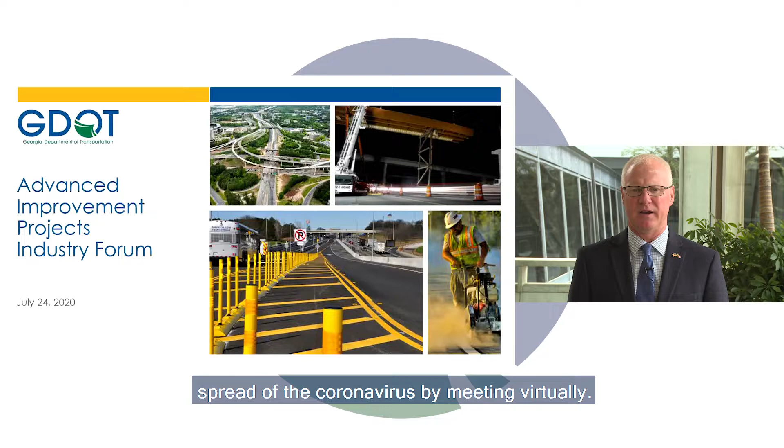Thank you for joining us and welcome. I'm Russell McMurry, the Commissioner of the Georgia Department of Transportation. This industry forum for 3 of the Interstate 285 Advanced Improvement Projects is a bit different from how we normally conduct our industry forums. In these unprecedented times, Georgia DOT is responding to the impact created by the spread of the coronavirus by meeting virtually.

We at Georgia DOT are committed to ensuring the health and safety of our team, our private industry partners, and the public, which is why the industry forum has been pre-recorded. I would like to personally thank you for being accommodating to this process and assure you that the members of the department are still able to provide information about the project's delivery goals, the anticipated scope, the anticipated procurement, and the potential risk in today's presentation. So without further ado, let's get started.

Thank you, Commissioner. My name is Darryl VanMeter, and I am pleased to be part of the leadership team in the P3 division at GDOT. Today is one of the many milestone days in the journey towards successful delivery of our program, and we're proud to have this opportunity to discuss these projects.

In this presentation, the department will provide information about the project's delivery goals, the anticipated scope, the anticipated details surrounding the MMIP, the procurement process, and the potential risks. We believe this information will be very valuable to the industry, who we look forward to partnering with in the delivery of our program. This is a recorded presentation.

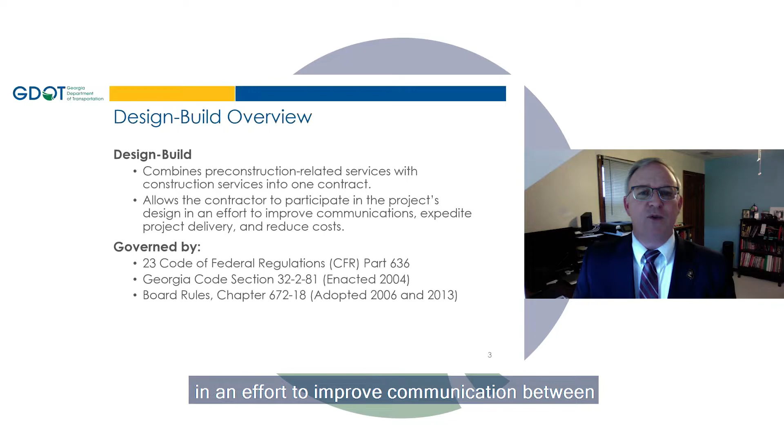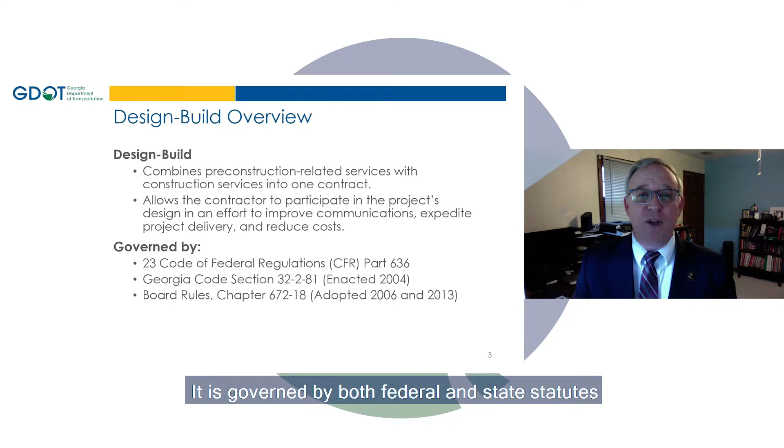The design-build delivery method combines pre-construction related services with construction services into one contract. It allows the contractor to participate early in the project's design in an effort to improve communication between disciplines, expedite project delivery, reduce costs, and deliver overall innovation and quality aligned with the department's goals. It is governed by both federal and state statutes and our board rules as shown here.

Today you will hear from several speakers. I will be giving an update on the MMIP overview. You'll hear from Andrew Honig, the department's Design Build Program Manager, who will provide guidance on the procurement process and requirements. You'll hear from 3 project managers, Xavier James, Anthony Tate, and Rick O'Hara of my office, who will speak to their respective projects and give you some details on project overview.

The MMIP represents significant long-term investment in the state's transportation infrastructure. This investment will improve mobility and enhance the quality of life on some of the most congested corridors in Georgia. I like to tell people the MMIP is all about mobility, and that it can be broken down into people and freight mobility. One of the critical pieces of analysis we had done independently was to understand what the return on investment is from the MMIP, and it is very impressive.

We recently reached a program milestone when the first of the MMIP projects reached substantial completion. Earlier in June, the first phase of the widening of I-85 opened to traffic. 2 other projects are under construction near Savannah, and we have several projects in active procurement.

Since announcing the MMIP, the department has been listening to the industry as well as other states with similar projects and capability, as well as other stakeholders.

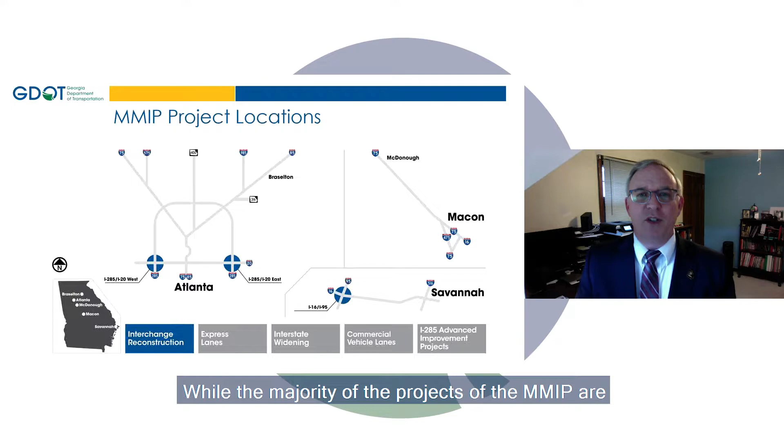We've reevaluated and will advance 6 improvement projects along 285. While the majority of the projects of the MMIP are in the metro Atlanta region, we consider the MMIP truly a statewide program, as there are 2 projects near Savannah, 2 widening projects north of Atlanta, and one commercial vehicle lanes project south of Atlanta between McDonough and Macon.

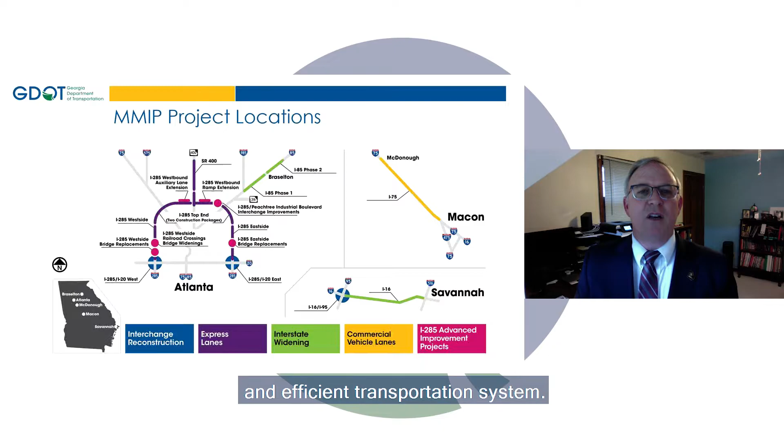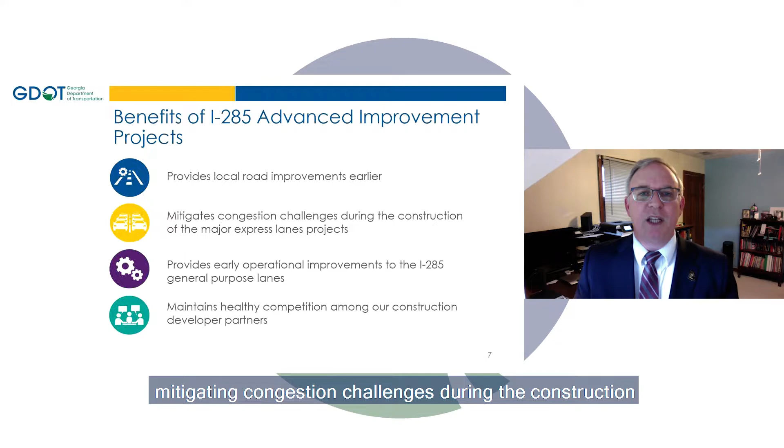With the addition of the express lanes, operational improvements, and safety enhancements, Georgia will have a more connected, safe, and efficient transportation system. With the advancement of the projects along 285, benefits to our state's motorists, residents, businesses, and indeed our industry partners include providing local road improvements sooner, mitigating congestion challenges during the construction of the larger major express lanes projects, providing earlier operational improvements to the 285 general purpose lanes, and maintaining healthy competition and opportunity among our construction partners.

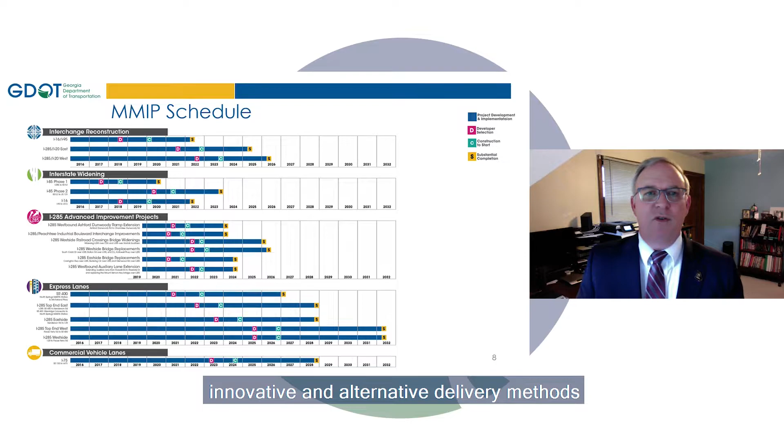The MMIP projects will be delivered through innovative and alternative delivery methods such as design-build and public-private partnerships, allowing GDOT to accelerate construction schedules. The projects will create additional capacity for more reliable trip times, more efficient movement of freight, safety improvements, and expanded multimodal options, including transit.

As you can see, the middle portion of this graphic highlights the I-285 advanced improvement projects. This graphic further distinguishes the program's phased approach at delivering these AIPs.

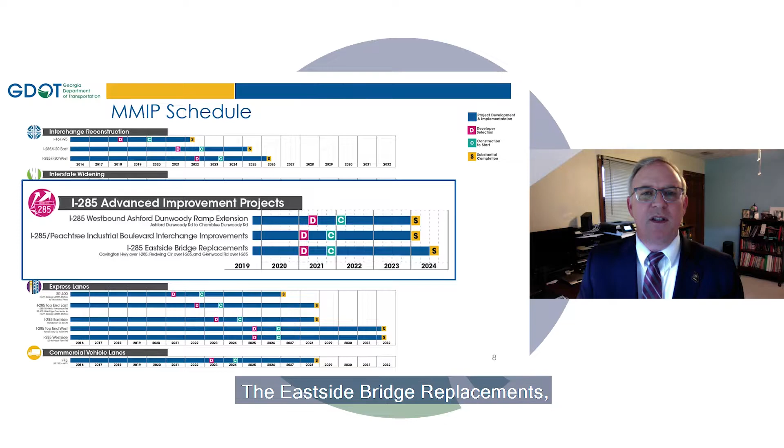The Eastside bridge replacements, PIB interchange improvement, and Westbound Ashford Dunwoody ramp extension projects will be the first 3 to let, all within the first and second quarters of calendar year 21. The 3 other AIPs will begin procurement in fiscal year 22.

And now I'd like to introduce and hand it over to Andrew Honig, GDOT's Design Build Program Manager, to go through the procurement timeline and next steps.

Thank you, Daryl, and thank you to everyone for viewing this Industry Forum presentation for 3 very exciting projects for the department. Today, I will be discussing the procurement process and timelines for the first 3 advanced improvement projects before the respective project managers discuss some of the project specifics.

The I-285 Eastside Bridge Replacement Project and the Ashford Dunwoody Ramp Extension Project will be procured as best value, while the PIB Interchange Project will be procured as a 2-phase low bid with a shortlist.

All 3 of these projects are advertised through separate PNAs on June 26th. Our industry forum is occurring through this pre-recorded presentation to the industry on July 24th, with one-on-one meetings occurring on July 27th and July 28th.

Following those one-on-one meetings, the Eastside Bridge Project's timeline is as follows. RFQ advertisement will be September 11th. SOQs will be received by the department on October 8th. The department will then notify the shortlisted firms on October 23rd, and the RFP will be issued on October 30th.

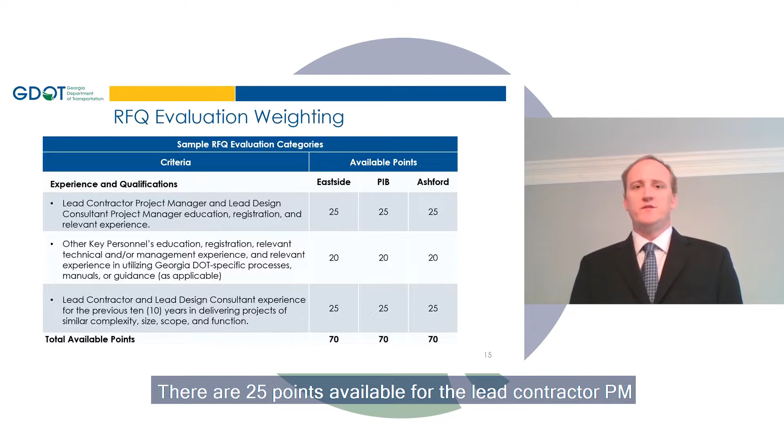This slide shows the sample RFQ evaluation categories for experience and qualifications, which are consistent for all three projects. There are 25 points available for the lead contractor PM and the lead design PM education, registration, and relevant experience. There are 20 points available for the other key personnel's education, registration, relevant technical and/or management experience, and relevant experience utilizing Georgia DOT specific processes, manuals, or guidance as applicable.

There are 25 points available for the lead contractor and lead design consultant experience for the previous 10 years in delivering projects of similar complexity, size, scope, and function. The subtotal for this section is 70 points.

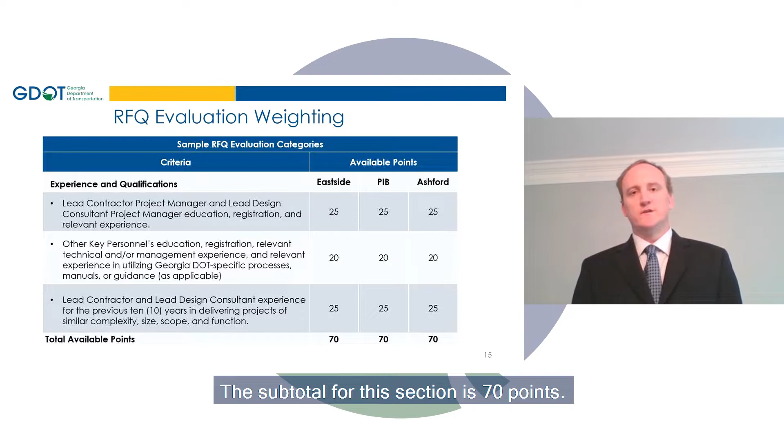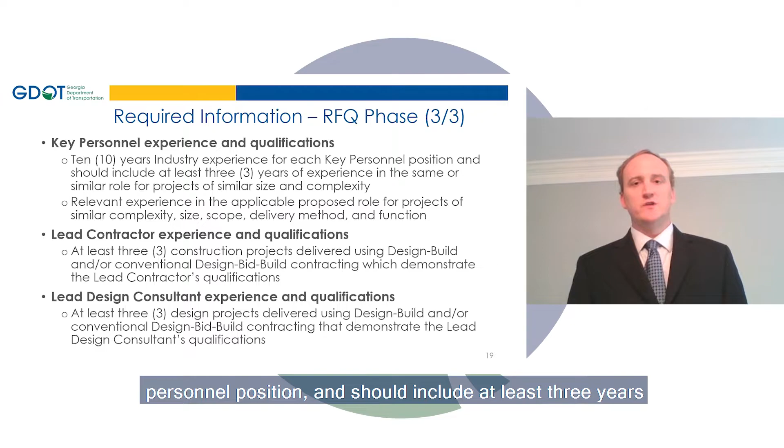Finally, proposers will be required to submit their key personnel experience and qualifications, including 10 years of industry experience for key personnel positions, and should include at least 3 years of experience in the same or similar role for projects of similar size and complexity.

The lead contractor is required to have 3 construction projects delivered through design build or design bid build contracting, and the lead design consultant must have at least 3 design projects using DB or DBB contracting.

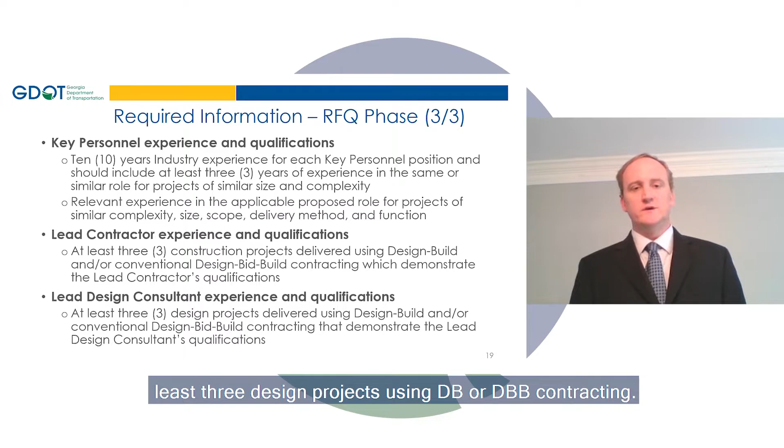Proposal packages will include a technical proposal and a price proposal with a firm fixed price secured by a proposal bond. The department does plan to provide a stipulated fee to responsive proposers not selected for award.

Proposers on best value procurements may submit ATCs, and again this is for the 2 projects that are best value, which are the Ashford Dunwoody ramp extension project and the I-285 Eastside bridge project.

As always, confidentiality will be maintained throughout the RFP process. We do anticipate holding one-on-ones during the RFP advertisement, and accepted ATCs will be approved on a project-specific basis.

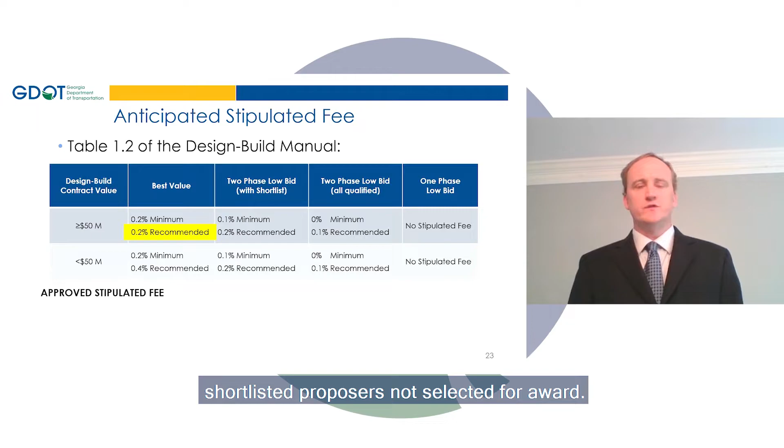As mentioned, all 3 of these projects will provide stipulated fees to the responsive shortlisted proposers not selected for award. Note the different approved stipulated fees for each type of procurement method, and also for each project.

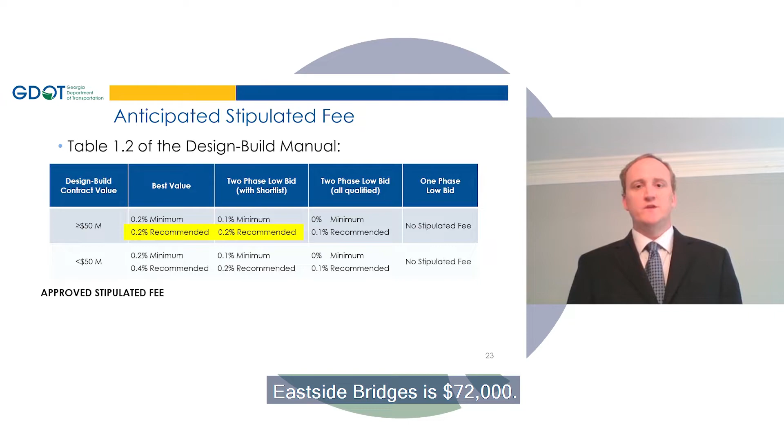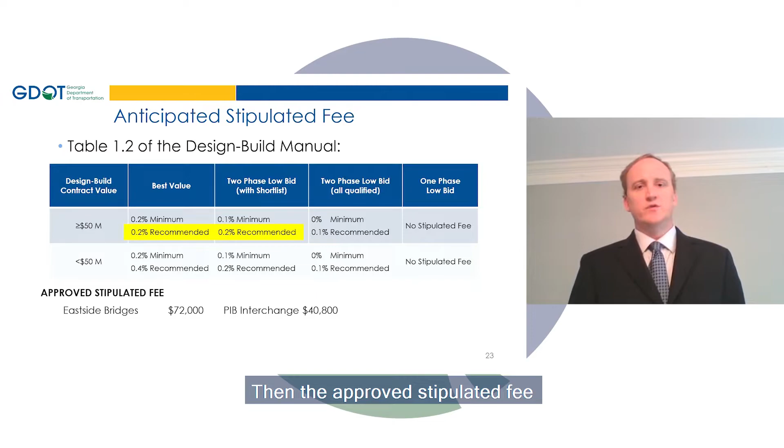The approved stipulated fee for Eastside bridges is $72,000. The approved stipulated fee for PIB interchange is $40,800. And the approved stipulated fee for the I-285 westbound Ashford Dunwoody ramp extension project is $100,000.

In exchange for a stipulated fee, proposers must turn over to GDOT all project relevant information collected and prepared during the preparation of the price and technical proposals.

This may include ATCs, revised plan layouts, geotechnical data, CAD files, and detailed project schedules, or any correspondence with any agencies that's done during the advertisement.

This information will be provided to the awarded design build team, and GDOT also has the ability to negotiate approved ATCs from non-successful proposers into the awarded DB team's contract in order to obtain additional value or cost savings.

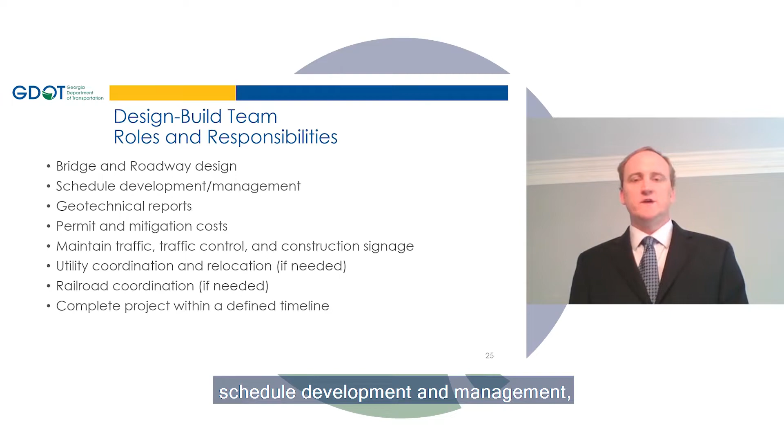The design build team's roles and responsibilities include bridge and roadway design, schedule development and management, geotechnical reports such as BFI and WFI, permit and mitigation costs if any, maintenance of traffic control and construction signage, utility coordination and relocation if needed, railroad coordination if needed, and completing the project within a defined timeline. There will be a construction time frame that you need to meet in the contract.

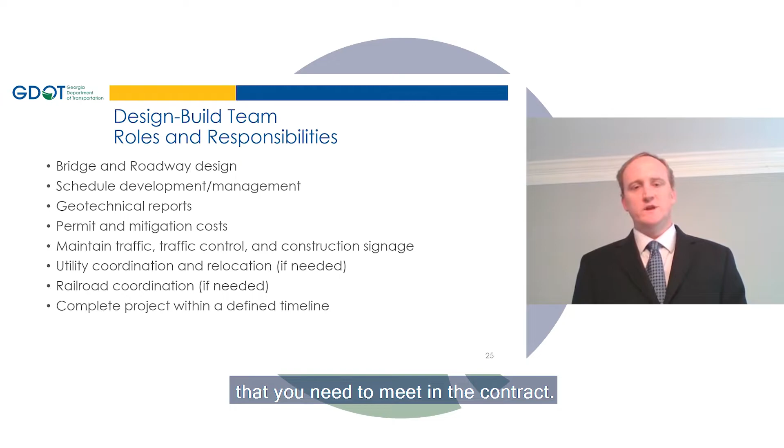Georgia DOT's roles and responsibilities include submittal review by GDOT and/or maybe our post-let GEC, environmental studies and NEPA reevaluation post-let, media relations, and also construction oversight and CEI.

Material testing will be provided by OMAT, and then CEI will be performed by GDOT OID or supported by a consultant procured by OID. The CEI consultant may not be a prime consultant or engineer of record on any AIP design build team.

Procurement for the CEI contract is expected to begin this fall, and it will be for all 6 AIP projects through one CEI contract. And with that, I'd like to turn the presentation over to Xavier James to discuss the

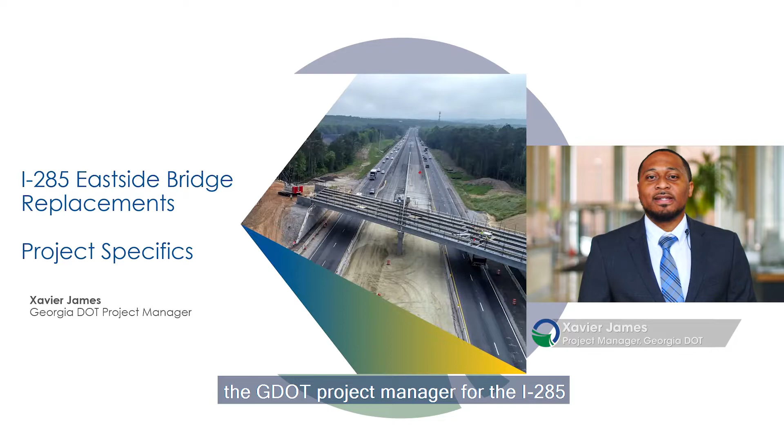I-285 Eastside Bridge project. Hello, my name is Xavier James, the GDOT project manager for the I-285 Eastside Bridge replacements. I will be discussing some project specifics with you today.

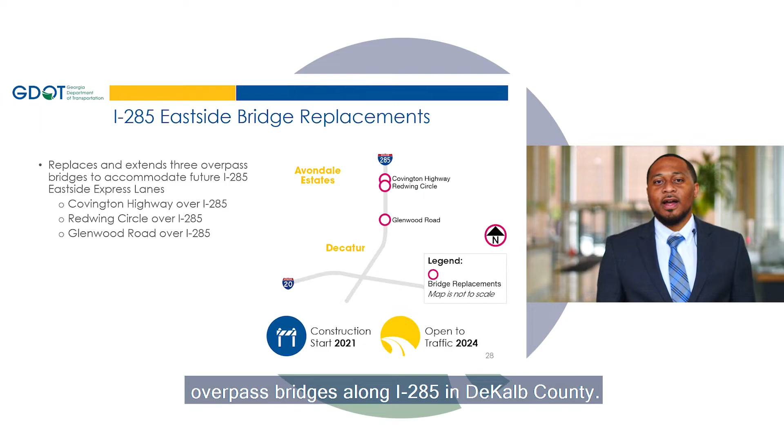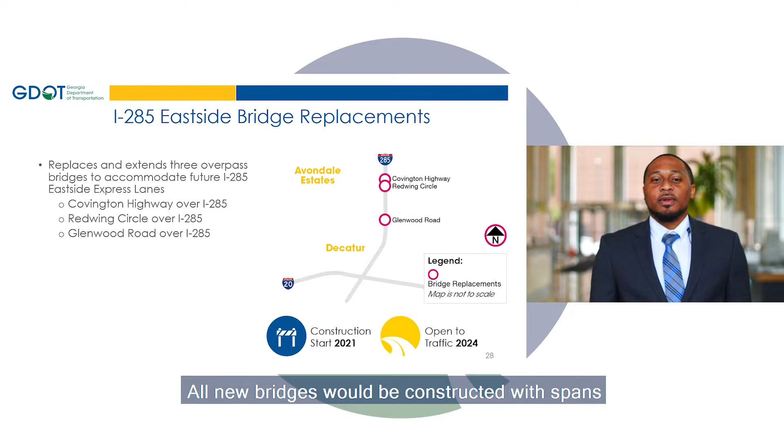This project proposes to replace and extend 3 overpass bridges along I-285 in DeKalb County. The map shows the 3 bridges to be replaced, which includes Covington Highway, Redwing, and Glenwood over I-285. All new bridges will be constructed with spans long enough to accommodate the future I-285 Eastside Express Lane project. Construction is anticipated in the beginning of 2021 and open to traffic in 2024.

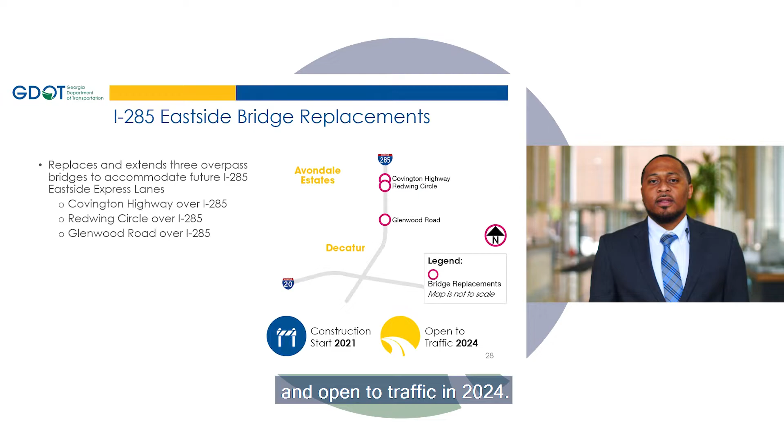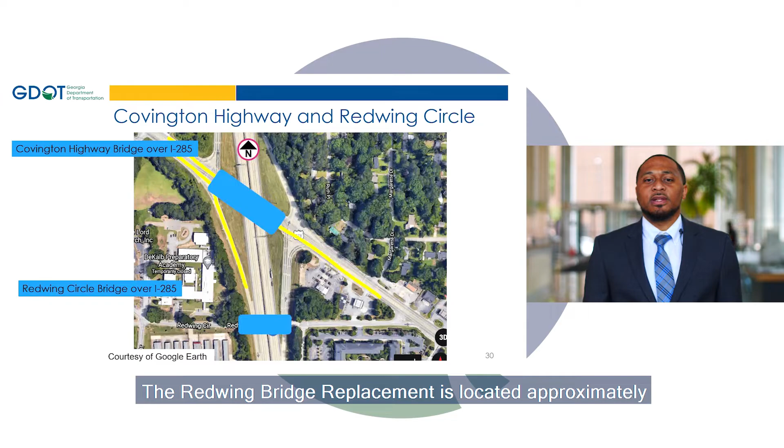The Redwing Bridge replacement is located approximately 2.6 miles north of the I-285 I-20 interchange. The replacement of the bridge will be on an existing alignment and will require a detour.

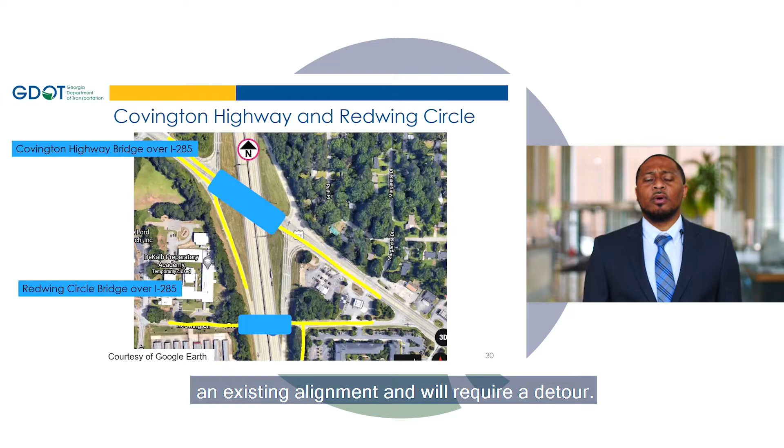The Covington Highway Bridge consists of 3 lanes in each direction and is also on a model route. This is a State Route 12, US 278. The new bridge will be built offset from the existing bridge. 3 of the 4 on-off ramps require work and the approach roads require extensive work.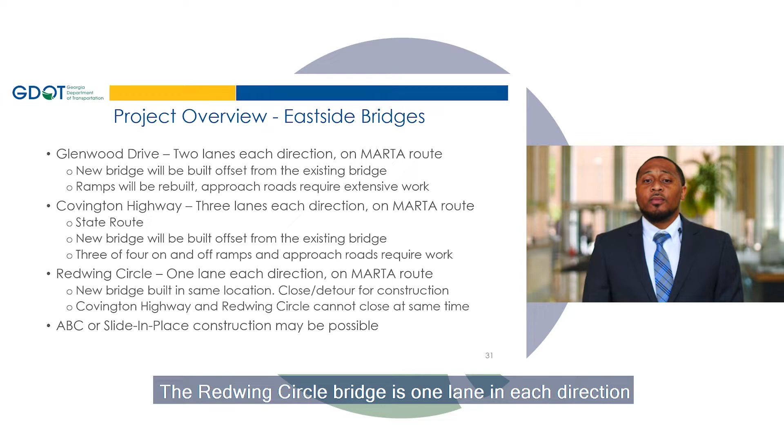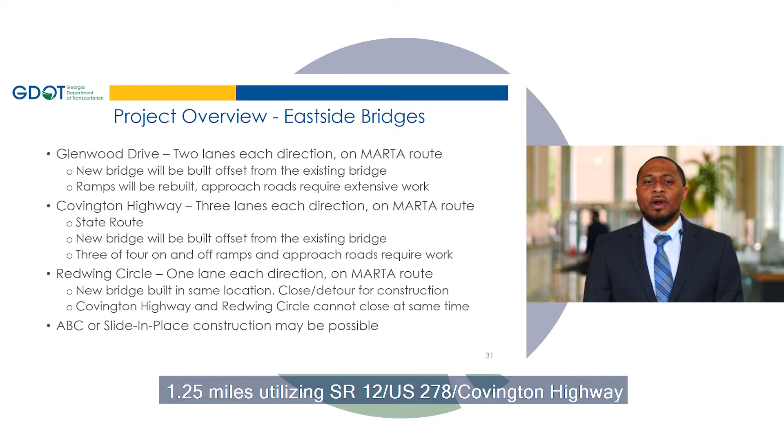The Redwing Circle Bridge is 1 lane in each direction and is also on a MARTA route. The new bridge will be built on an existing alignment and will require a detour for construction. The proposed detour route is approximately 1.25 miles utilizing State Route 12, US 278, Covington Highway to the north, and the proposed detour duration is approximately 6 to 8 months.

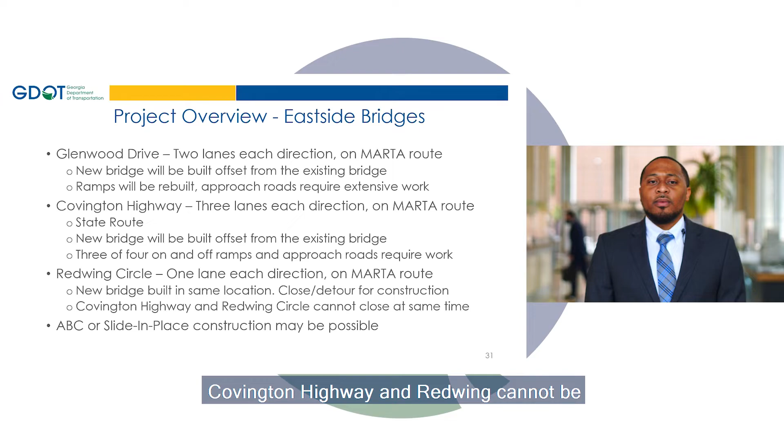Covington Highway and Redwing cannot be closed at the same time. ABC or Slide-In-Place construction may be possible.

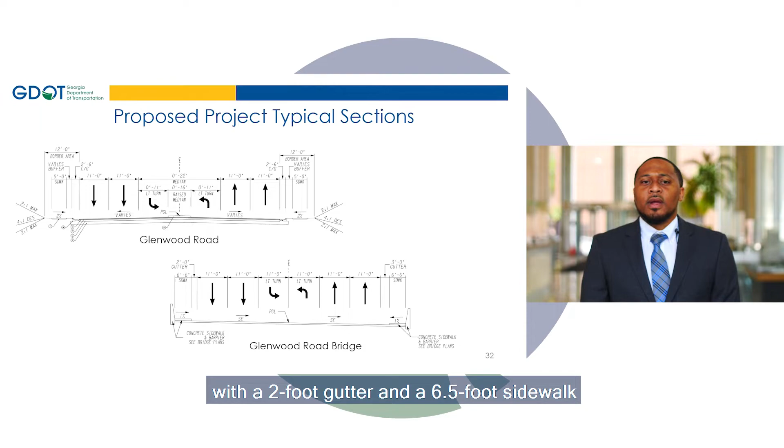This slide shows the proposed typical section for Glenwood Road and Glenwood Road Bridge. The proposed typical section consists of 11-foot travel lanes in the eastbound and westbound direction with a 2-foot gutter and a 6.5-foot sidewalk on each side of the bridge. Left turn lanes are also proposed to access the I-285 northbound and southbound ramp entrances.

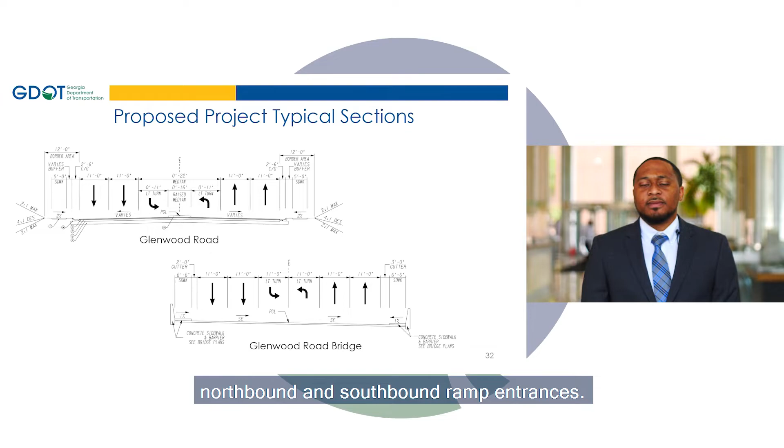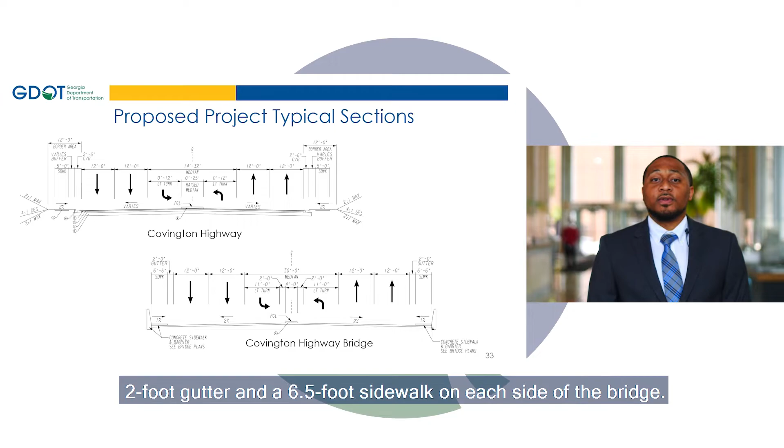This slide shows the proposed typical section for Covington Highway and Covington Highway Bridge. It consists of two 12-foot travel lanes in the east and westbound direction with a 2-foot gutter and a 6.5-foot sidewalk on each side of the bridge. A single 12-foot left turn lane is proposed in each direction to access I-285 north and southbound ramp entrances.

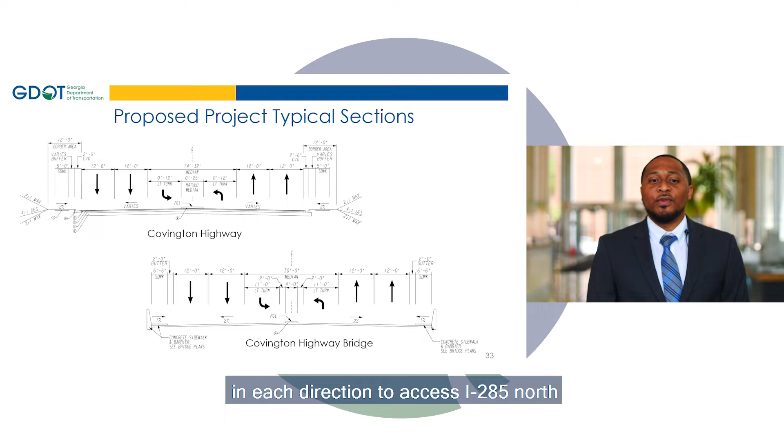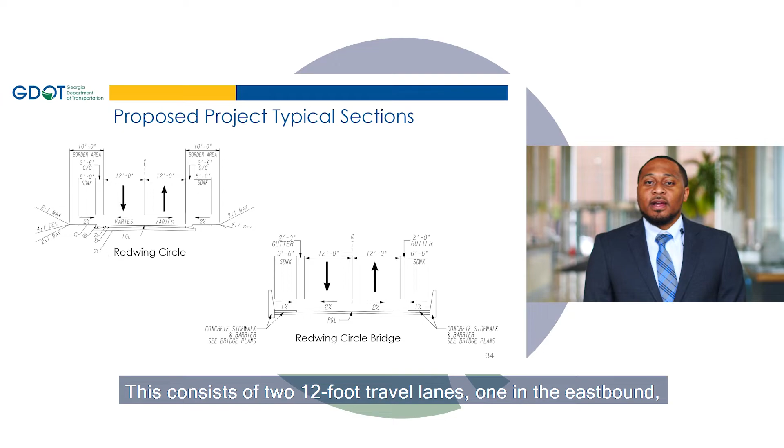This slide shows the proposed typical section for Redwing Circle and Redwing Circle Bridge. This consists of two 12-foot travel lanes, 1 in the eastbound direction, 1 in the westbound direction, with a 2-foot gutter and a 6.5-foot sidewalk on each side of the bridge. The proposed profile would be raised in order to obtain the current minimum required vertical clearance over the I-285 mainline lanes.

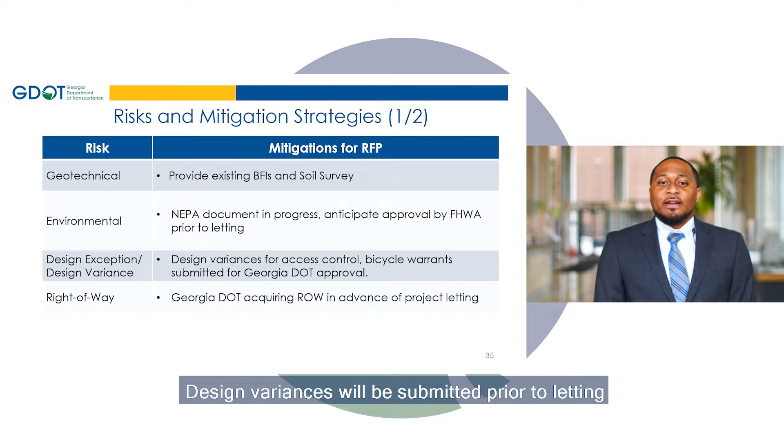The project has minimum risk. The NEPA document is in progress and the approval is anticipated prior to the letting. Design variances will be submitted prior to the letting, and GDOT is acquiring right-of-way in advance of the project letting.

There has been ongoing outreach with local and impacted stakeholders, including MARTA. Utility relocation is required, and GDOT is currently working on coordination. Relocation should occur concurrently with construction.

This project will use the best value method for procurement. The first phase criteria were covered earlier, and the second phase will begin with the issuance of the RFP on October 30th, 2020. The RFP best value weighing will be 30% on the score of the technical proposal and 70% on the score of the price proposal.

The proposer with the lowest proposed project cost will be awarded the maximum of 700 points, and all others will be scored as a function of their relative cost.

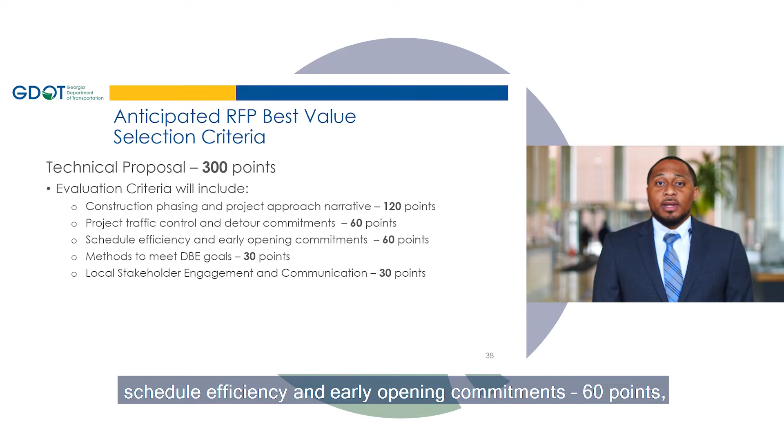The technical proposal will be scored out of a possibility of 300 points. The evaluation criteria will include construction phasing and the project approach narrative, 120 points; project traffic control and detour commitments, 60 points; schedule efficiency and early opening commitments, 60 points; methods to meet DBE goals, 30 points; and local stakeholder engagement and communication, 30 points.

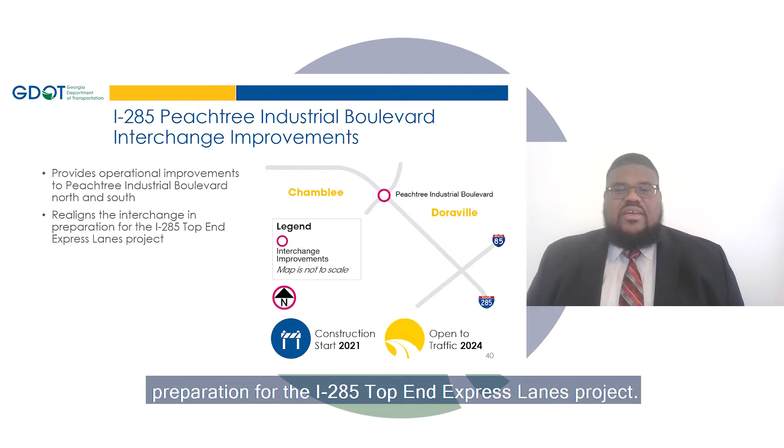I'm Anthony Tate, Georgia DOT Project Manager for the I-285 Peachtree Industrial Boulevard Interchange Improvements Project. I will be discussing the project over the next several slides. The project provides operational improvements by combining the I-285 westbound exit ramps to Peachtree Industrial Boulevard north and south. It also realigns the interchange in preparation for the I-285 Top-End Express Lanes project. Construction is due to start in 2021, and the project's anticipated completion is 2024.

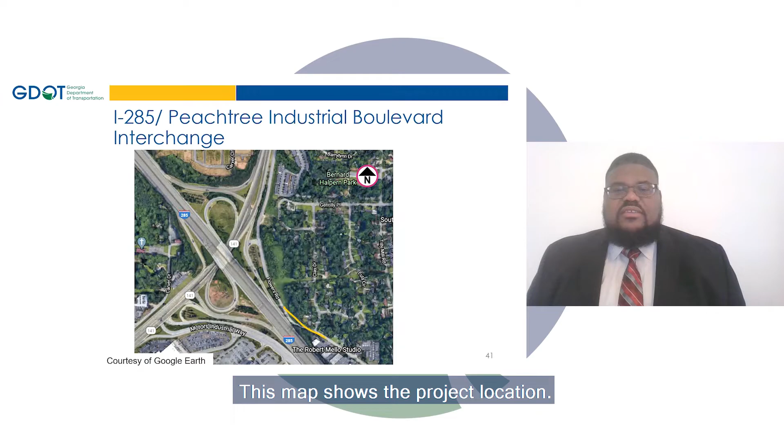This map shows the project location. Flowers Road will be realigned. The ramp to northbound PIB will be reconstructed with an additional exit lane. A single lane bridge will be constructed over PIB. The newly constructed exit ramp will connect to the existing PIB southbound ramp from 285. This project will create a two-lane exit from I-285 West to Peachtree Industrial Boulevard, with one lane continuing in each direction.

A new exit lane and full-width shoulder will be constructed adjacent to the existing exit lane, beginning approximately 1,000 feet east of the current departure point. A painted gore will separate the two lanes of exit traffic from the general purpose lanes.

One lane will continue to PIB northbound. Access to Flowers Road will be eliminated. One lane will continue to PIB southbound. A single lane bridge will be constructed over all lanes of PIB. Part of Flowers Road, a local city road, will be realigned to accommodate the new ramp.

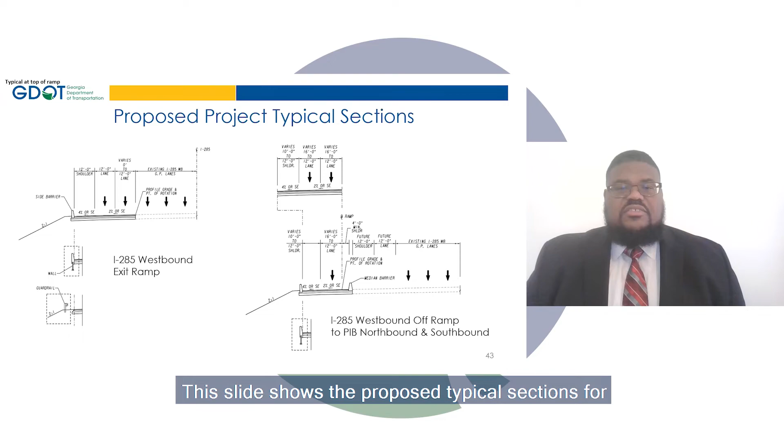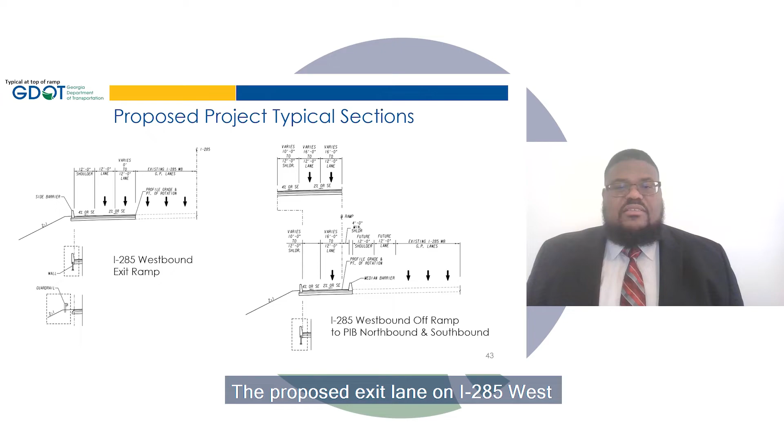This slide shows the proposed typical sections for the I-285 westbound ramp and the I-285 westbound off-ramp to PIB northbound and southbound. The proposed exit lane on I-285 West will be 12 feet wide with a full-width shoulder. The proposed two-lane exit ramp will be full-width exit lanes with a full-width shoulder. The new bridge structure will have a single lane and a full-width shoulder.

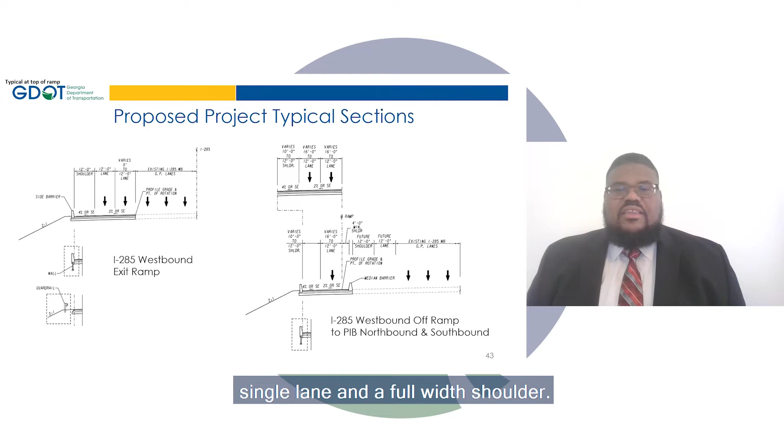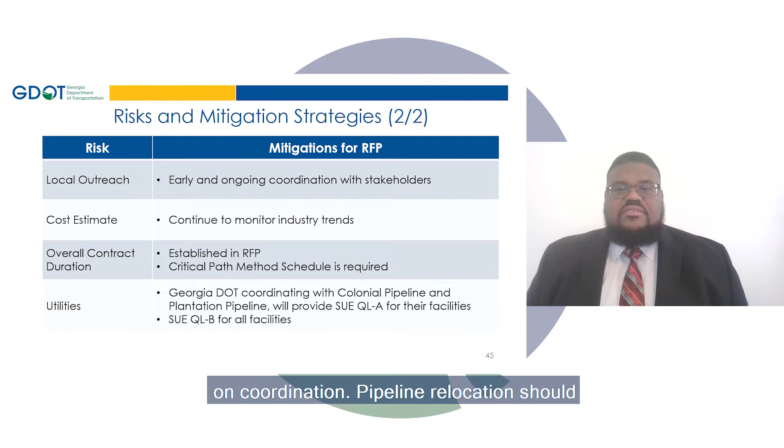Utility relocation is required, and Georgia DOT is currently working on coordination. Pipeline relocation should occur concurrently with construction. The project will use the two-phase low bid method with a short list.

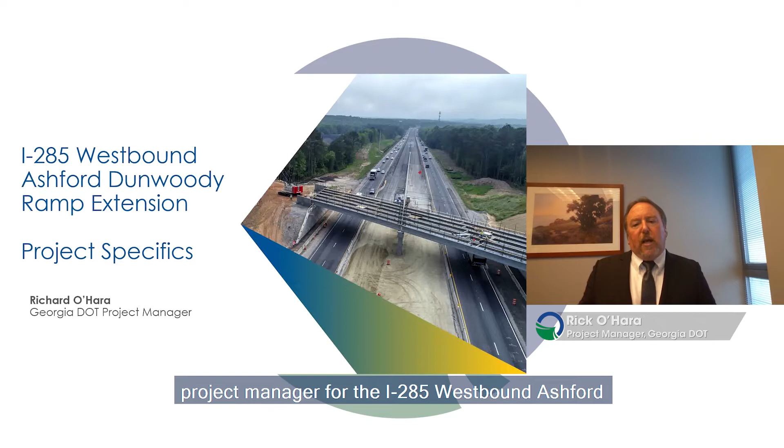Hello, I'm Rick O'Hara, and I serve as the Georgia DOT Project Manager for the I-285 westbound Ashford Dunwoody ramp extension project. The next several slides will discuss the project. The I-285 westbound Ashford Dunwoody ramp extension project is proposed from just east of the Chamblee-Dunwoody Road Bridge over I-285 to Ashford Dunwoody Road. The project length is approximately 1.6 miles.

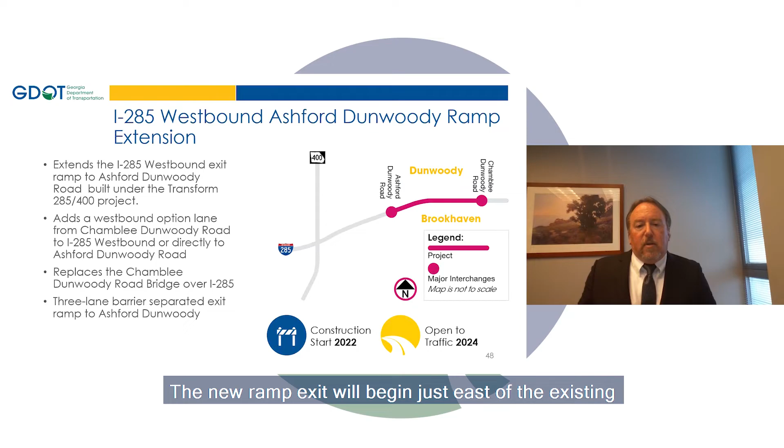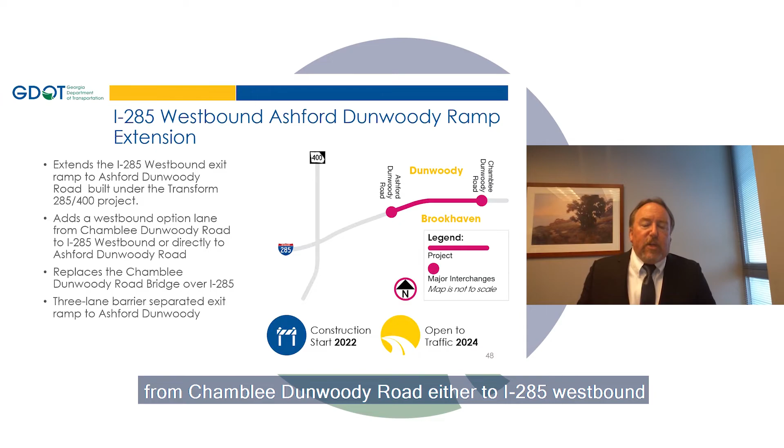This project proposes to extend the westbound I-285 exit ramp to Ashford Dunwoody Road, currently being built under the Transform 285-400 improvement project. The new ramp exit will begin just east of the existing Chamblee-Dunwoody Road Bridge over I-285. The project also proposes to add a westbound option lane from Chamblee-Dunwoody Road either to I-285 westbound or directly to Ashford Dunwoody Road as part of the ramp system.

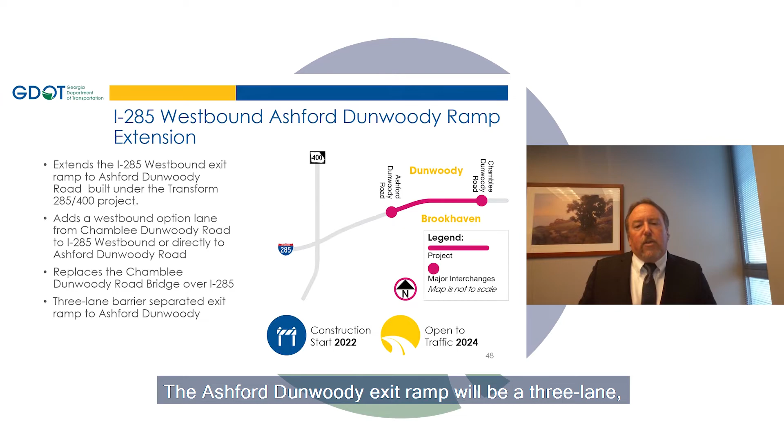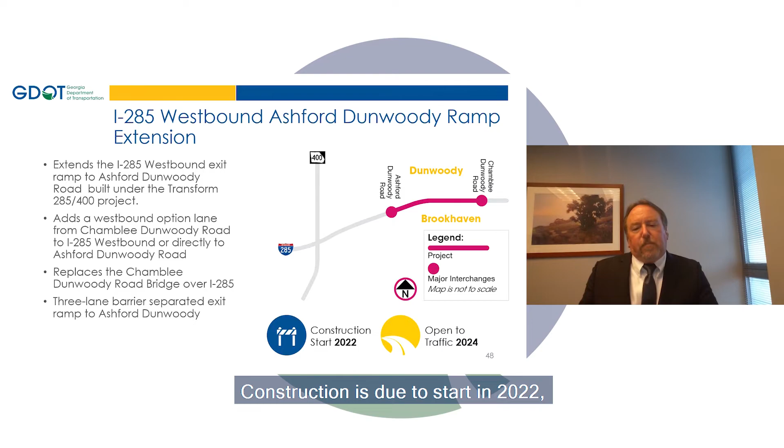Additionally, the project proposes to replace the Chamblee-Dunwoody Road Bridge over I-285. The Ashford Dunwoody exit ramp will be a 3-lane barrier-separated system just north of the existing westbound general purpose lanes. Construction is due to start in 2022, and this project's completion is anticipated in 2024.

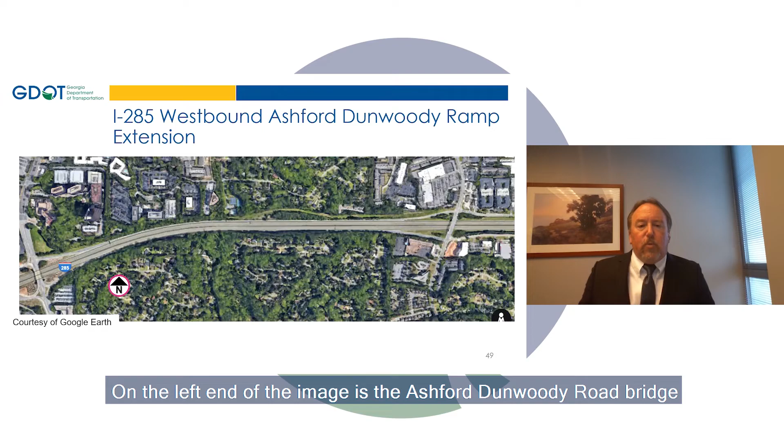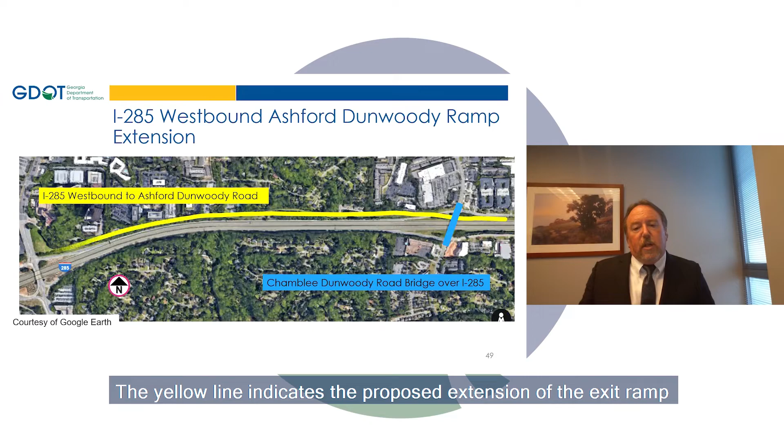This map shows the project location. On the left end of the image is the Ashford Dunwoody Road Bridge over I-285, and on the right end is the Chamblee Dunwoody Road Bridge over I-285. The blue bar indicates the proposed replacement of the Chamblee Dunwoody Road Bridge, which will be lengthened to accommodate the ramp extension beneath it. The yellow line indicates the proposed extension of the exit ramp from I-285 general purpose lanes to Ashford Dunwoody Road.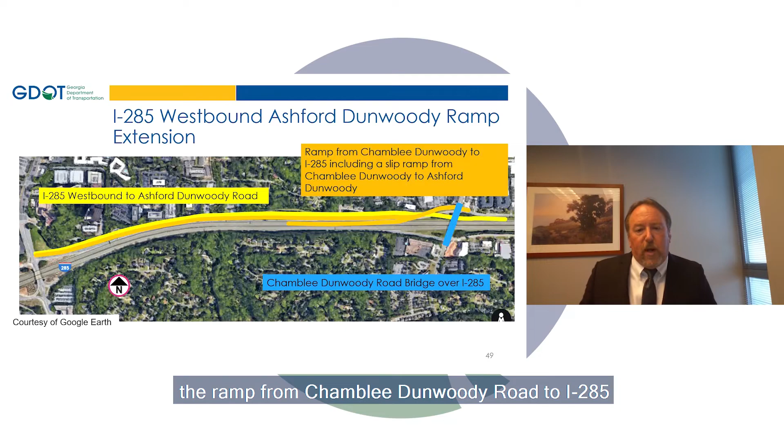The orange line indicates the proposed extension and reconstruction of the ramp from Chamblee Dunwoody Road to I-285, including a slip ramp from Chamblee Dunwoody Road to Ashford Dunwoody Road. The selected design build team will be responsible for creating a 3-lane barrier separated exit ramp to Ashford Dunwoody Road.

This ramp must include a new exit ramp from I-285 westbound to Ashford Dunwoody Road, with the extension beginning approximately 1,000 feet east of the Chamblee Dunwoody Road Bridge over I-285. This extension will start as 2 lanes, then join with the Chamblee Dunwoody Road ramp to end in 3 lanes.

A new 2-lane entrance ramp from Chamblee Dunwoody Road to I-285 westbound is proposed to be an elevated structure braiding over the exit ramp extension for Ashford Dunwoody Road. Additionally, this ramp's lanes will separate into options for either I-285 westbound general purpose lanes or onto Ashford Dunwoody Road.

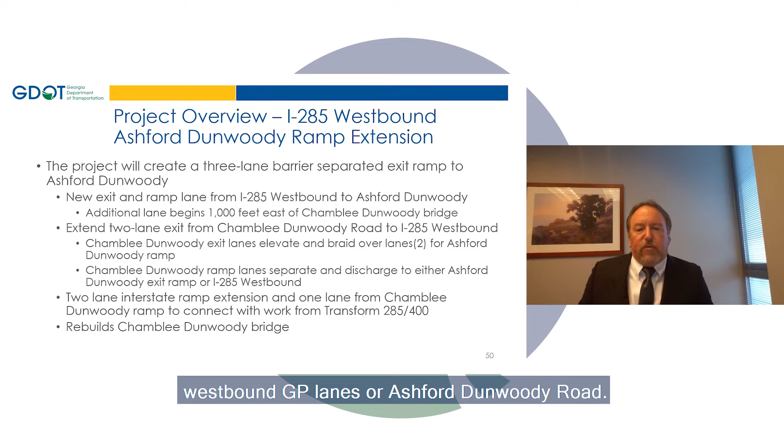At Ashford Dunwoody Road, this project work will connect directly to the work being completed under the Transform 285-400 improvement project.

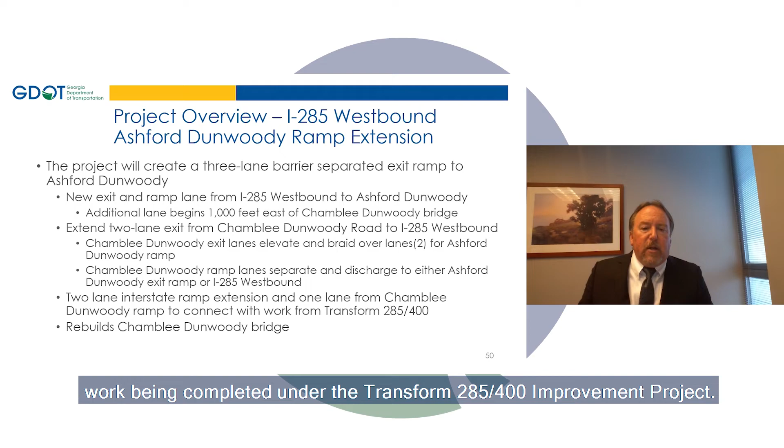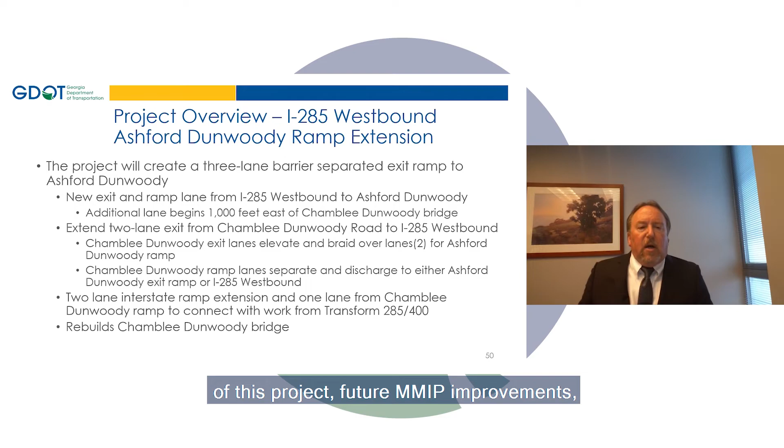This project proposes to replace the Chamblee Dunwoody Road Bridge with a longer, wider structure to accommodate the work of this project, future MMIP improvements, and an upcoming city streetscape project as well.

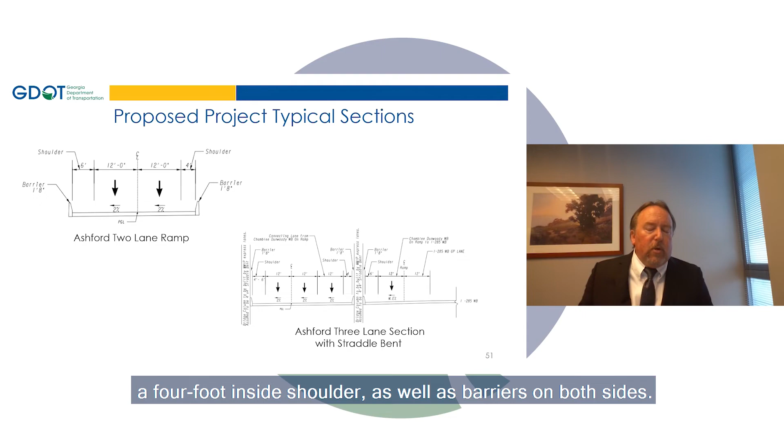This slide shows the proposed typical sections. You can see the 2-lane portion of the Ashford Dunwoody ramp extension currently under construction, shown on the top left with 2 12-foot lanes, a 6-foot outside shoulder, and a 4-foot inside shoulder, as well as barriers on both sides.

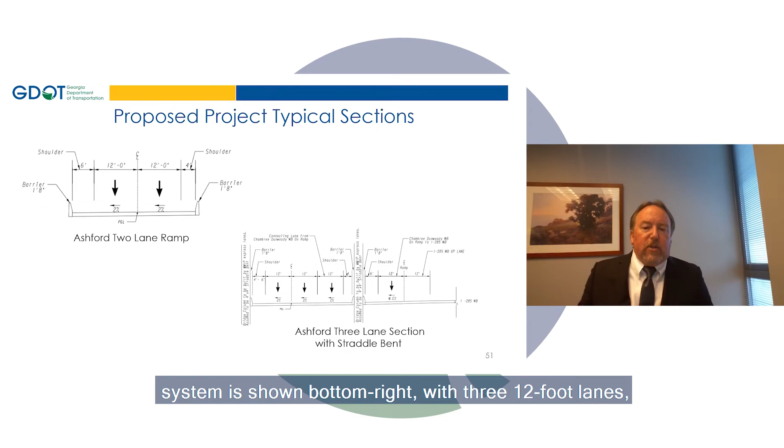The proposed section for the 3-lane portion of the ramp system is shown bottom right, with 3 12-foot lanes, a 4-foot 6 outside shoulder, and a 4-foot inside shoulder.

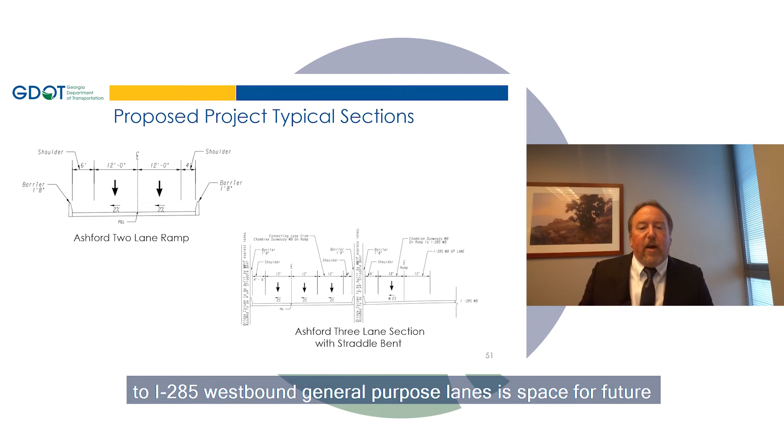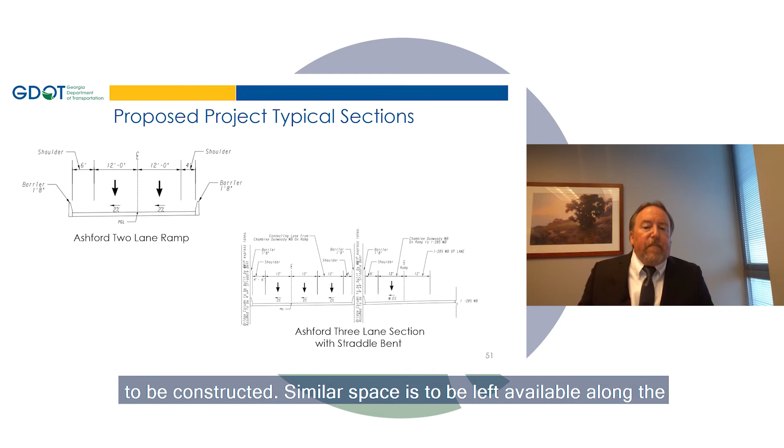Between these lanes and the lane from Chamblee Dunwoody Road to I-285 general purpose lanes is space for future straddle bents, part of the I-285 top end express lanes to be constructed, and similar space is to be left available along the outside shoulder of the 3-lane ramp section.

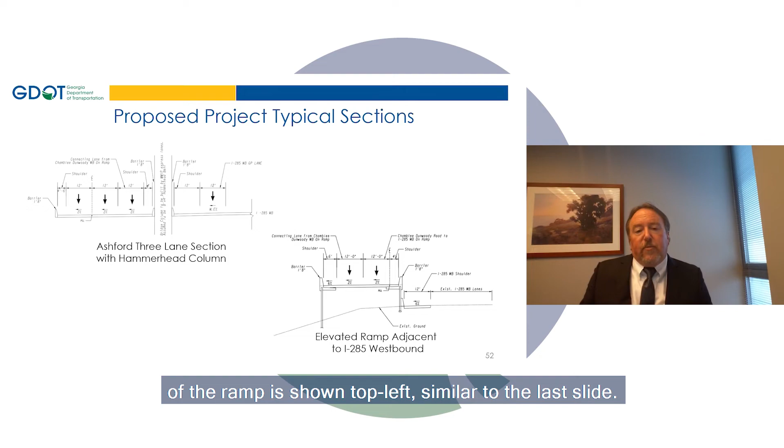The proposed typical section for the 3-lane portion of the ramp is shown top left. Similar to the last slide, this typical shows the space needed between the ramp system and the I-285 westbound general purpose lanes.

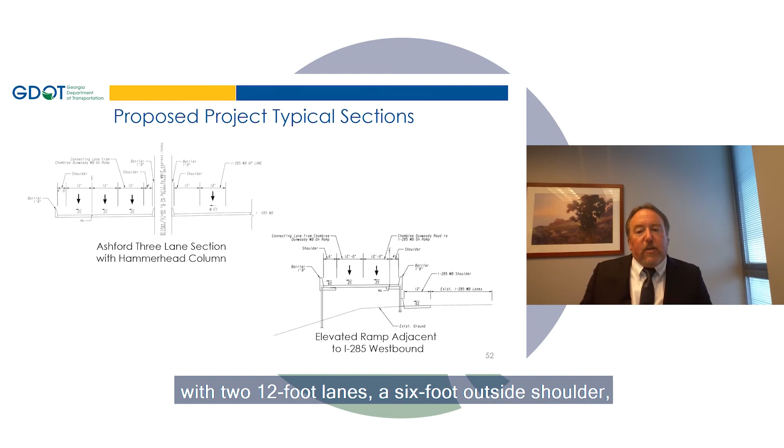The proposed typical section for the 2-lane elevated ramp from Chamblee Dunwoody Road is shown bottom right, with 2 12-foot lanes, a 6-foot outside shoulder, and a 4-foot inside shoulder.

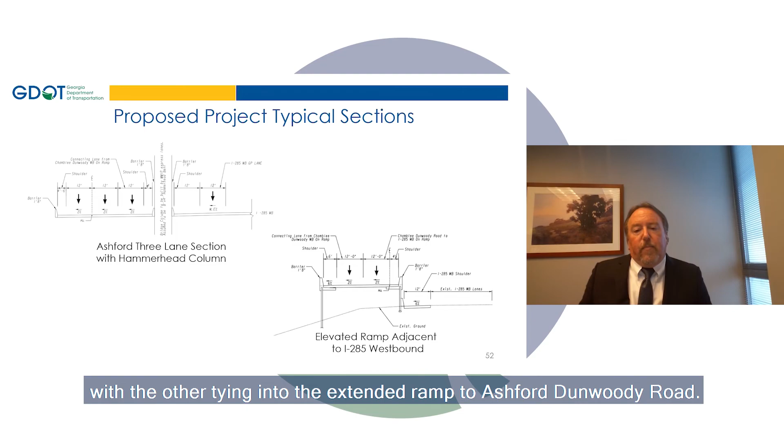This graphic also shows which lane will branch off to the I-285 westbound general purpose lanes, with the other tying into the extended ramp to Ashford Dunwoody Road.

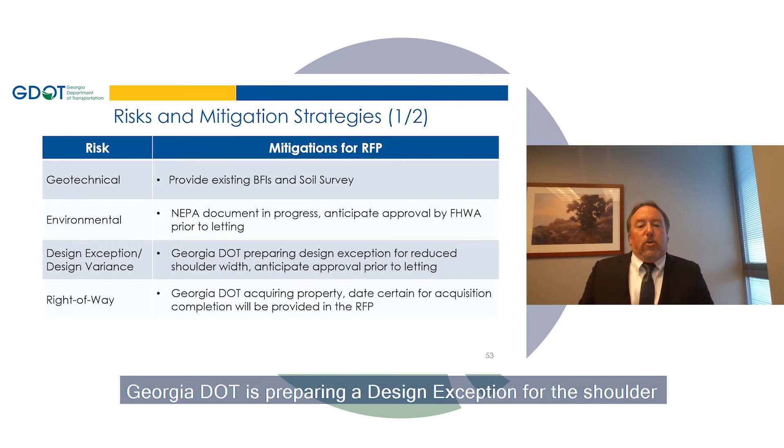This project overall has minimal risks. The NEPA document is in progress, and FHWA approval is anticipated before letting. Georgia DOT is preparing a design exception for the shoulder width reduction along the ramp and anticipates FHWA acceptance before letting.

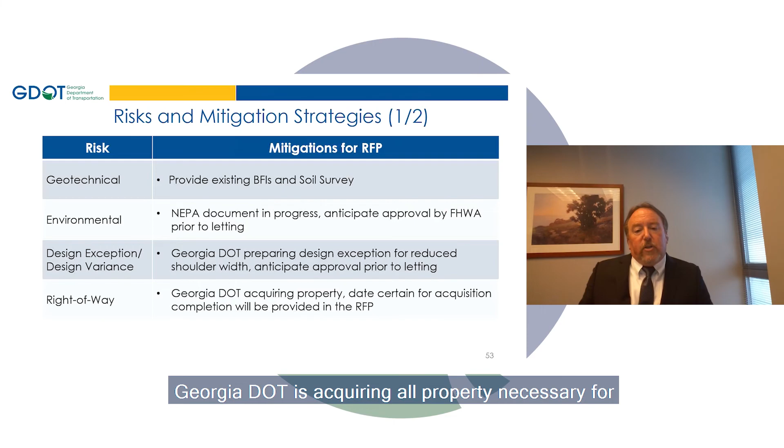Georgia DOT is acquiring all property necessary for the project prior to NTP 1, and a date certain for acquisition completion will be included in the RFP.

Early outreach with stakeholders is currently ongoing. This has included cities, homeowners associations, area civic groups, and Georgia DOT is currently coordinating with utilities such as Georgia Power to acquire signed MOUs for the utility relocations before letting.

This project will use the best value method for procurement. The first phase criteria were covered earlier in the presentation, and the second phase will begin with the issuance of the RFP on February 5th, 2021.

The RFP is weighted 25% on score of the technical proposal and 75% on score of the price proposal. The proposer with the lowest possible project cost will be awarded the maximum 750 points, and then all others will be scored relative as a function of their cost.

The technical proposal will be scored out of a possible 250 points. The evaluation criteria will include minimization of traffic disruptions, 100 points; schedule efficiency and early completion, 75 points; local stakeholders engagement, 50 points; and DBE utilization, 25 points.